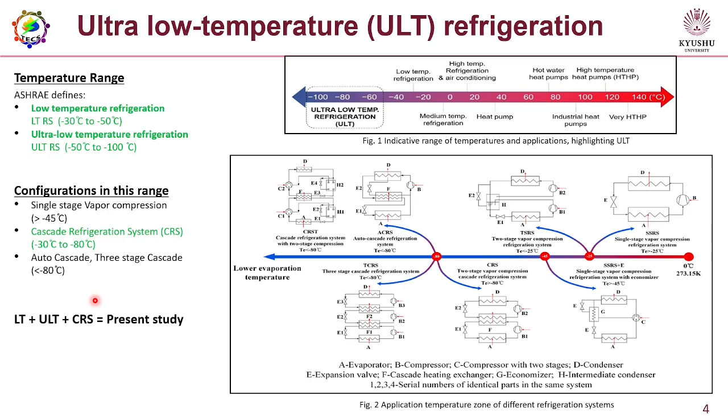As shown in this figure 2, it shows suitable configurations for different temperature ranges starting from 0 degrees Celsius up to -80 degrees Celsius. And it clearly shows that the best possible vapor compression cycle is the cascade refrigeration cycle if we want to attain from -30 to -80 degrees Celsius. So the present work is based on low and ultra low temperature refrigeration and cascade refrigeration configuration.

Further going below, from -33 to -60 degrees Celsius, the applications are blast freezing and freeze drying for foods, for biological materials, and for pharmaceutical and COVID vaccines. The refrigeration capacity ranges from 1 to 100 kilowatts. And in this application range, we see that single stage refrigeration systems, two stage refrigeration systems, and cascade refrigeration systems also come into operation.

Further moving below, from -53 degrees Celsius to -73 degrees Celsius, the applications are condensation of volatile organic compounds, mRNA vaccines like Pfizer's, and environmental chambers for material testing. The refrigeration capacity is several kilowatts, and we can see for this cascade refrigeration systems and two-stage refrigeration systems are utilized.

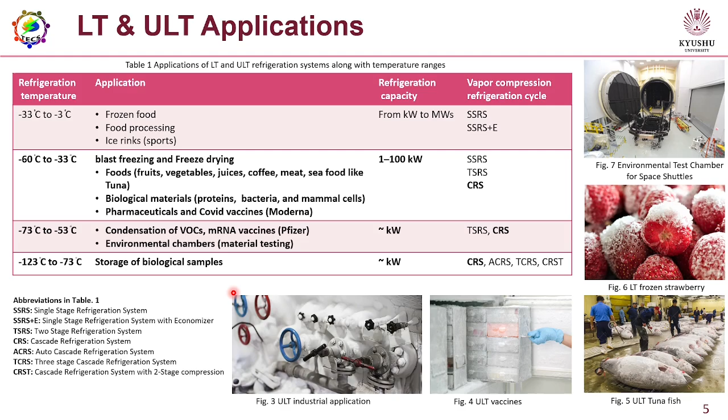The cascade heat exchanger acts as a condenser for the low temperature cycle and an evaporator for the high temperature cycle. Heat flows from the refrigerated space to the evaporator, from the evaporator to the cascade heat exchanger, from the cascade heat exchanger to the condenser, and then finally to the environment.

Reaching below minus 45 degrees Celsius is not thermodynamically feasible with a single vapor compression cycle. The temperature lift of minus 80 to 40 degrees Celsius, that is 120 degrees Celsius, is so huge that a single compressor cannot handle this enormous pressure ratio and its volumetric efficiency collapses. So that is the reason we have to use a cascade refrigeration system if we need to reach below temperatures of minus 45 degrees Celsius.

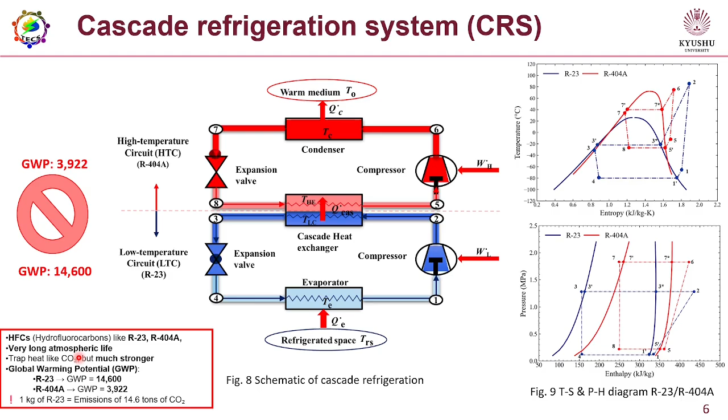Along with that motivation lie a number of other reasons which also support this mandate. The first reason is the high pressure of regulatory measures to reduce hydrofluorocarbons and global warming. According to the Kigali Amendment 2016, HFCs will be reduced by more than 80% over the next 30 years, and it is already ratified by 163 countries, including the European Union.

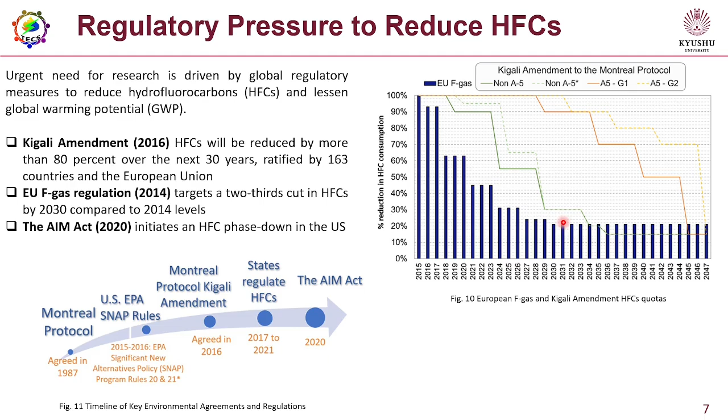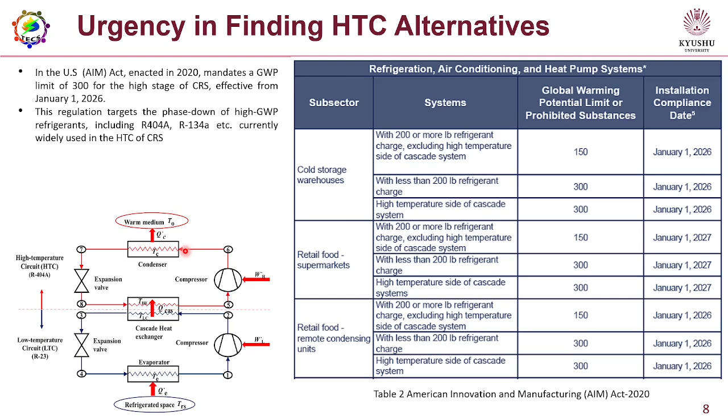food remote condensing units. This regulation targets the phase down of high GWP refrigerants including R404A and R134A, which are currently widely used in the high temperature cycle of a cascade refrigeration system. Similarly, for low temperature cycle refrigerants like R23, the AIM Act sets a GWP limit of 700 with an exit fluid temperature up to minus 50 degrees Celsius effective from January 1, 2028. But it does not cover temperatures below minus 50 degrees Celsius.

Why is no clarification given for systems operating below minus 50 degrees Celsius? The reason is that there are fewer ULT units in operation compared to other commercial applications like HVAC, and due to fewer units they have low environmental impact. Also, to date no alternate refrigerant solution exists for ULT applications, and there is still a research and development lag. This is why there is a lack of clarity across all regulatory authorities regarding the GWP limit for applications below minus 50 degrees Celsius.

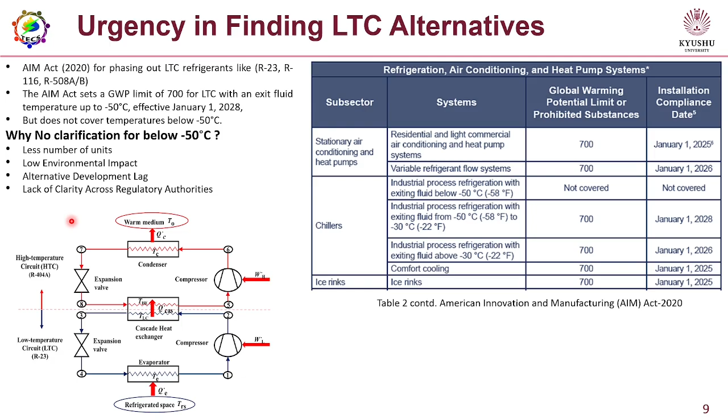The second reason is the skyrocketing costs of these refrigerants. The HFC quotas have triggered a dramatic price surge, up to a 1050% increase in the price of R134A and a 1250% increase in the price of R404A by 2024 compared to 2014. For ULT refrigerants like R23 and R508B, the GWP is 4 times higher than R404A, so we can expect even steeper hikes for them. Further increase is expected as regulation tightens under the EU F-gas regulation and Kigali Amendment.

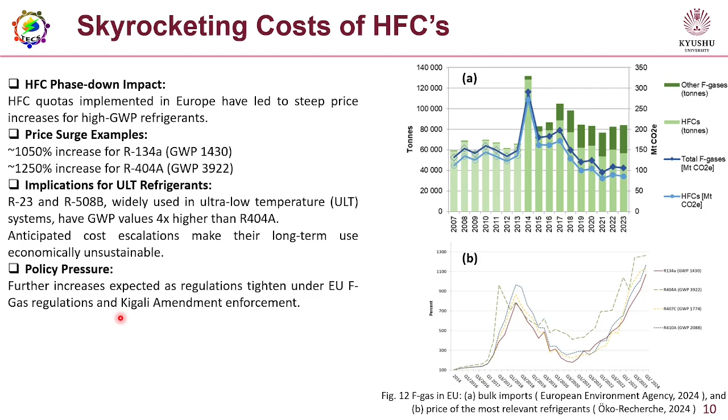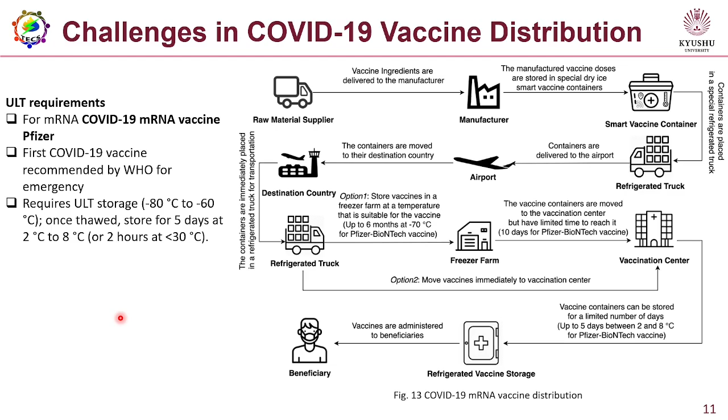The third reason is the drastic increase in their numbers. After COVID-19, the number of ULT systems has drastically increased. A complete cold chain is to be established for the safe, secure, and reliable distribution of mRNA vaccines, which need stringent temperature control up to minus 80 degrees Celsius. So the number of ULT systems has increased after COVID-19 and is still increasing with these high GWP refrigerants, which needs attention.

The fourth reason is their energy intensiveness. These ULT vaccine storage freezers are highly energy intensive and need stringent operating conditions. For example, a 700-liter ULT freezer consumes energy comparable to a 20 cubic meter walk-in cold room. So these are highly energy intensive units producing a lot of indirect emissions.

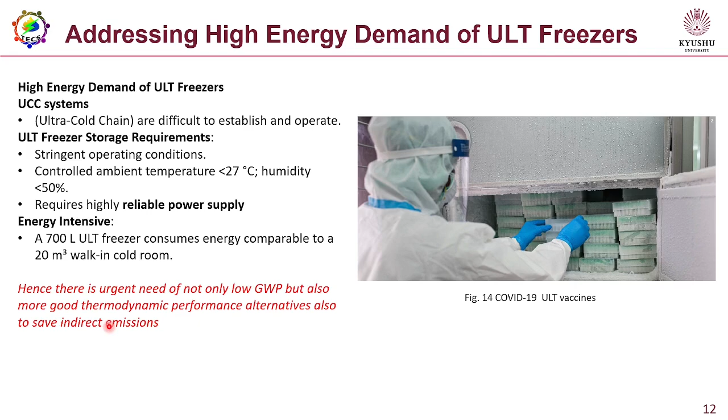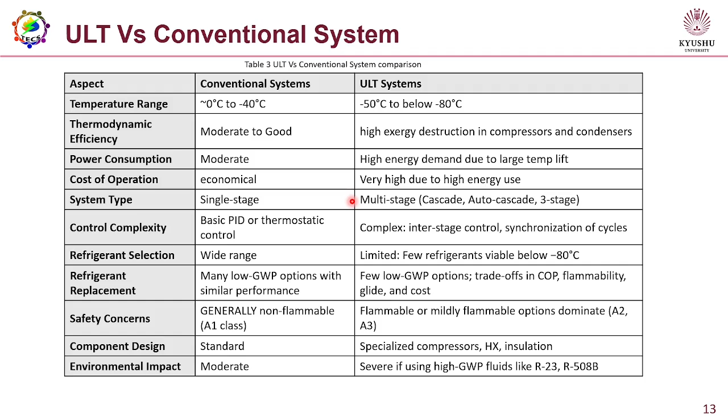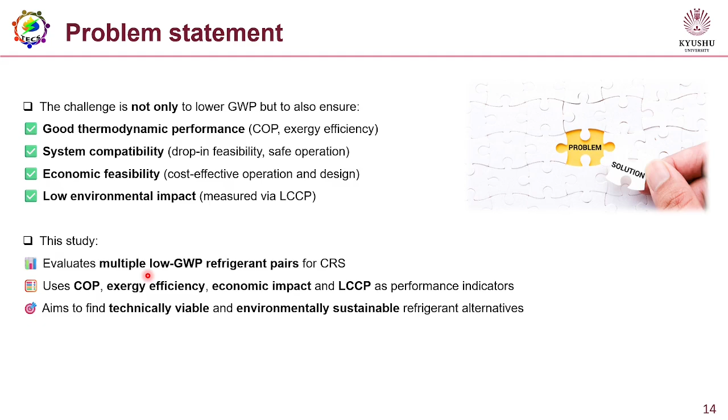Their environmental impact is also higher because of this energy intensiveness and high GWP refrigerants. This all shows that selecting a suitable refrigerant for ultra low temperature systems is much more difficult compared to a simple vapor compression cycle. So the challenge is not only to lower the GWP but to ensure good thermodynamic performance, system compatibility, economic feasibility, and low environmental impact. The present study caters to all these fundamental factors to find the best possible refrigerant solution for ULT, ultra low temperature systems. So this was the introduction section, chapter 1 of my defense. In the next video I will share the methodologies and the results in detail.